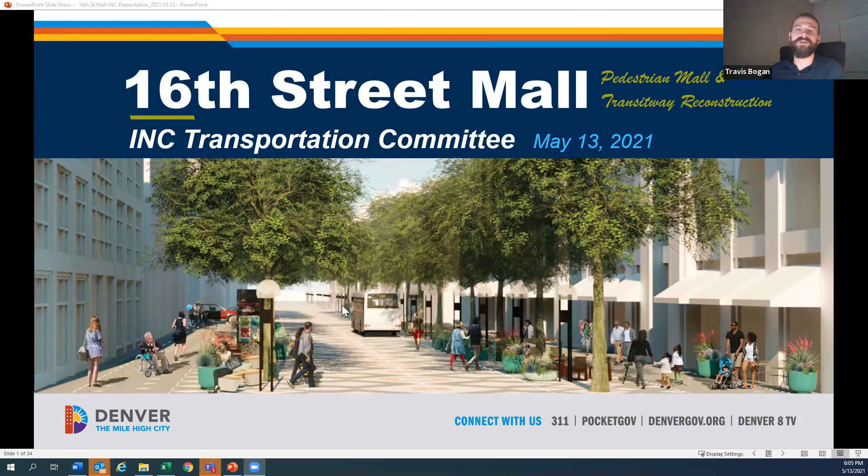Well, thank you everyone so much. We appreciate the opportunity to present to you tonight with an update on the 16th Street Pedestrian Mall and Transitway Reconstruction Project. We'll be going through quite a bit of material over the next 20 minutes, so we've reserved some time at the end for Q&A. Just wanted to provide an overview that the 16th Street Pedestrian Mall and Transitway, as you know, is one of the most successful pedestrian malls in the nation. Some pre-pandemic numbers: the free mall ride shuttle was supporting almost 40,000 RTD riders daily. It's a resource for downtown workforce, downtown residents, businesses, and tourists.

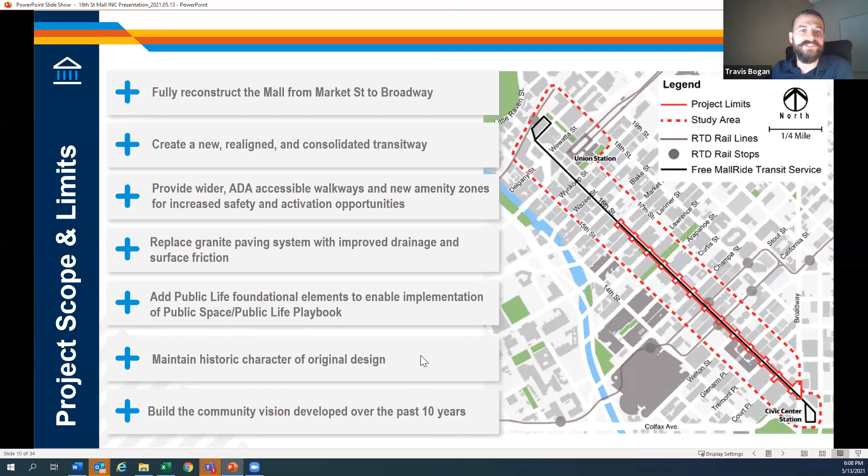Really important to the project is the public life elements that'll be integrated into the project, and Jason Whitlock will talk a little bit more about that. Throughout this whole project, we are committed to maintaining the historic character of the original design and really leveraging the community vision that's been developed over the last 10 years.

I want to give you a quick overview of the project schedule. As Joel mentioned, we issued notice to proceed to PCL constructors on April 6th. So we're a little over a month into an approximately 45-month-long project, and it is a design build project.

We're initiating the design development that'll last really into fall of 2022. But we are doing some early pre-construction work starting a little bit later this spring and going into fall, and that'll include our subsurface utility explorations, the potholing, and additional surveying.

Later towards the end of this year, there may be some early Xcel utility relocations for some construction enabling work, and that early work would really primarily be limited to intersections. The real construction, the mobilization for the mall block reconstruction, is planned for the summer of next year, and the project will be complete by the end of 2024.

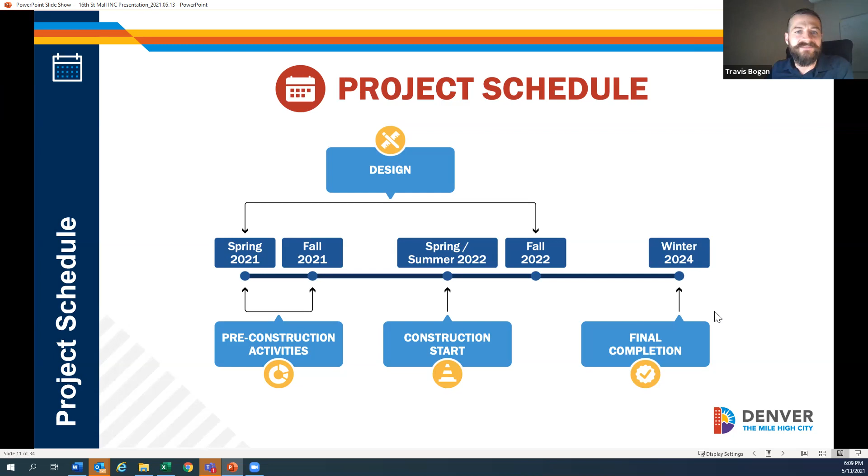Just wanted to give a quick update on the budget. The capital stack for the project is pretty complex. Much of the funding we have has been in development for years and has clear ties to the mall. We're leveraging a lot of external funding partners, including TIF administered through DURA, some local CIP funds, some voter-approved Elevate funds, local wastewater funds, and additional state and federal funds.

We also have a blended team to help deliver this project, collaborating with a number of city agencies and a robust stakeholder group. We have program management and construction oversight support from consultant partners, and then, of course, we have our design build partner, PCL.

Just a little bit of project background. I think I'll transition this over to Jason.

Thank you, Travis. Again, my name is Jason Whitlock. I'm with Community Planning and Development, part of the city, and on our urban design team. As we are and have been looking at the importance of this street, really our city and our region's main street, the number of people, as Travis was talking about, that live on the mall now.

Actually, we're starting to see the number of residential on the upper side of the mall sort of increase, almost similar to the number of people living in Lodo, people that work there, people that come and visit and play. It's been important for us to do a series of studies, a series of engagements with the community throughout the process to understand kind of what the role of the street is, and how it changes.

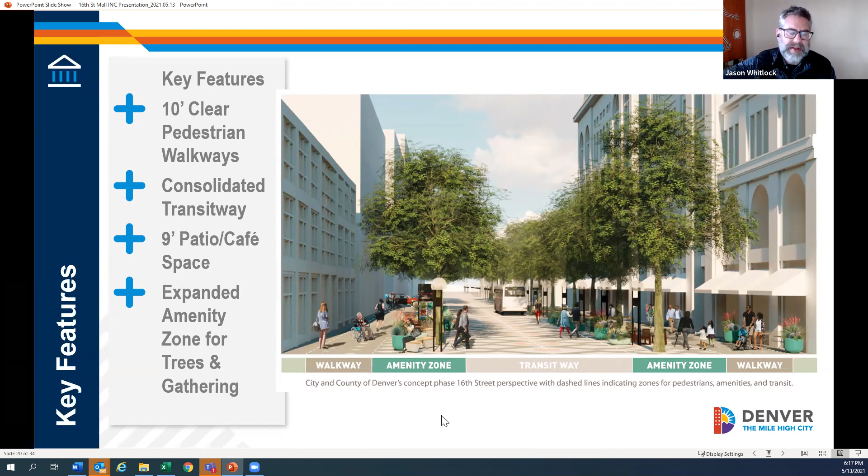And so it provides us these really good two-sided experiences on both sides of the mall as you walk up and down, and you have some distance between you and the bus, divided by that amenity zone.

The kinds of things that we're investigating now, the things on the surface, those things will actually be really 90% of what people experience as a different place on the mall - the vibrancy, additional kinds of seating, better locations for greenery, understanding the importance of planting and greenery as part of our space and our life in this downtown environment.

A variety of seating - we're calling these seating postures - the idea that the kinds of seats, the invitations that we make are really important so that people feel like they can make those acquaintances, have that coffee, and stop within the space.

So we're doing a series of studies on the kinds of furniture, furnishings, and additional planting that we're going to be putting in the future design of the mall.

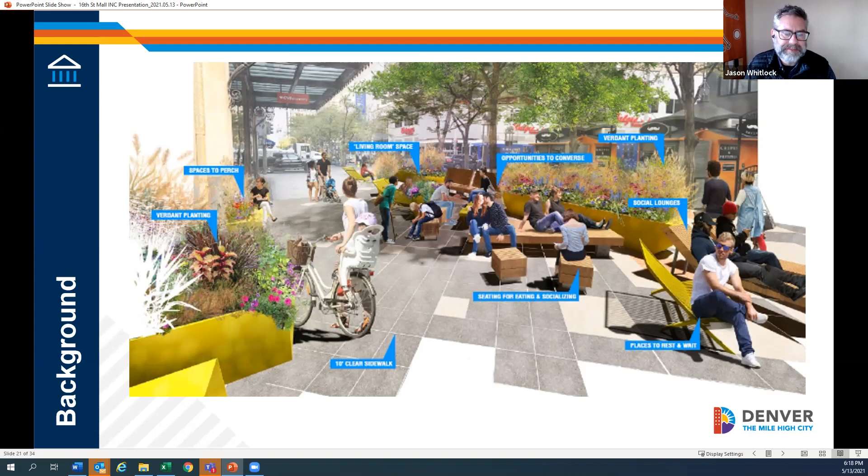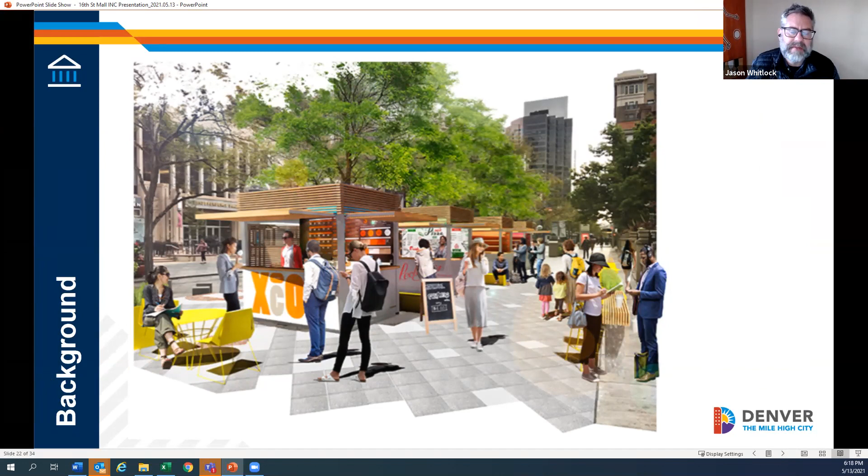And then lastly, the idea that the great streets we have throughout the country and the world tend to be shorter than the 1.5 miles of the mall length. They tend to be in smaller chunks. So we're focusing some activity on these key blocks and key character areas - we could have blocks where we're collecting some of these downtown vending kiosks and creating really good spaces there for us to have in the future.

Thank you, Jason. I'm going to continue on with a little bit of a project update.

As I mentioned, we've hired PCL as the design build contractor, and they've assembled a really great team that includes a number of disadvantaged business enterprises to support the project. We do have a DBE design goal and construction goal on this project.

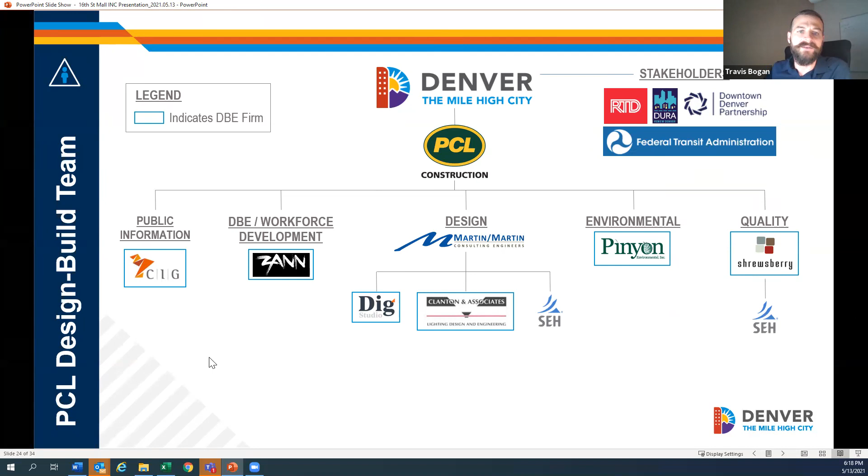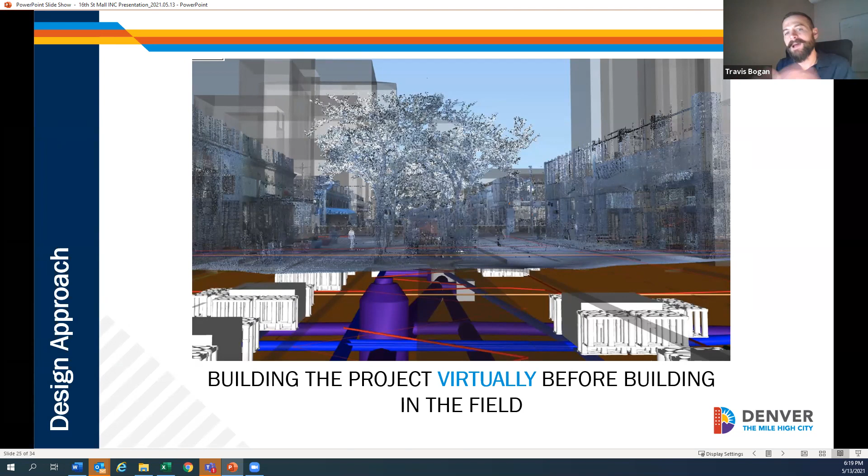And really what's neat about this model, you can see right now, is looking up from the ground. We're able to identify and design around potential utility conflicts.

We're basically building the project virtually before building it in the field. And doing this really enables identification of conflicts and resolution of those before we actually get out with construction equipment.

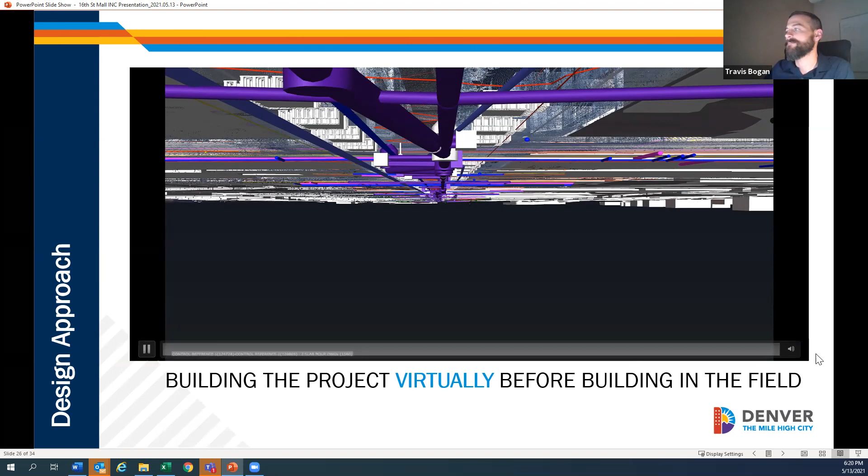We do have a robust public outreach approach, because this project is going to impact a lot of people. Part of our approach includes providing dedicated public information officers from both the city side and PCL side. We're developing a public information plan and a crisis communication plan.

We have a number of public outreach tactics that we're implementing, including providing materials in English and Spanish and making sure those materials are ADA accessible. We'll have a 24/7 hotline and website, really clear, concise wayfinding and signage. We want to make sure we communicate key project information and progress using a lot of different media - renderings, infographics, flyers, newsletters, e-blasts, website updates.

We'll have a number of pop-up events, and of course, we are going to coordinate with other projects like the Convention Center expansion and any Skyline Park work that could be going on.

Want to also mention that Denver's Department of Economic Development and Opportunity is providing business support. As we mentioned, the mall is home to over 300 businesses. 200 are really directly located on the mall, and about half of those 200 are locally owned.

So for 2021, DEDO has $300,000 dedicated to support these mall businesses, and that support will come in the forms of technical assistance, helping them prepare for construction activities, small business stabilization grants, and identification and support in attracting potential new mall tenants.

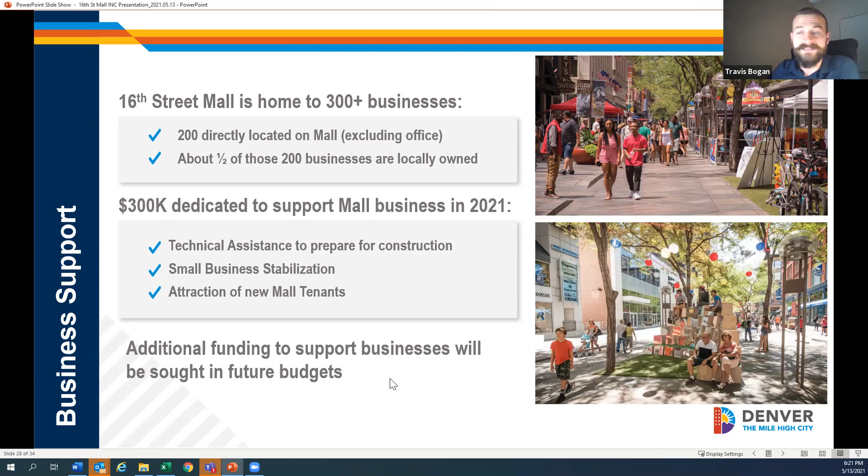And the construction will typically be in 3 phases. The first phase will be construction within the transit way and extended limits. While the construction is occurring in this zone, pedestrians will be safely routed alongside the storefronts. This will be really the longest duration, likely a little bit over a year.

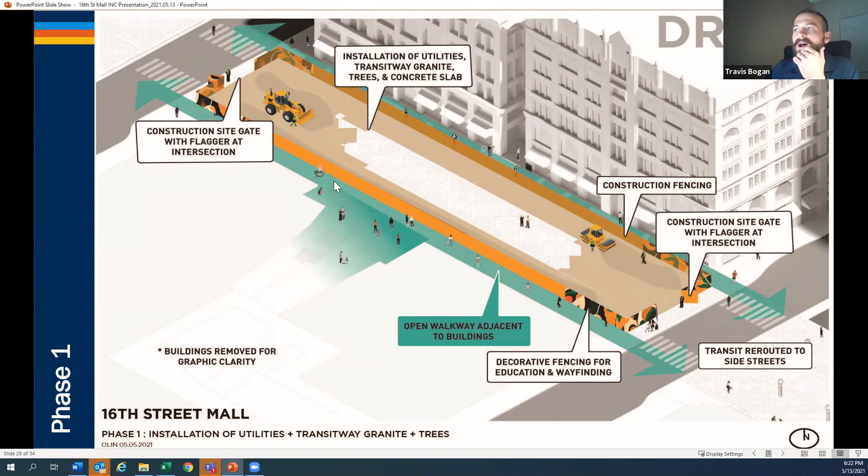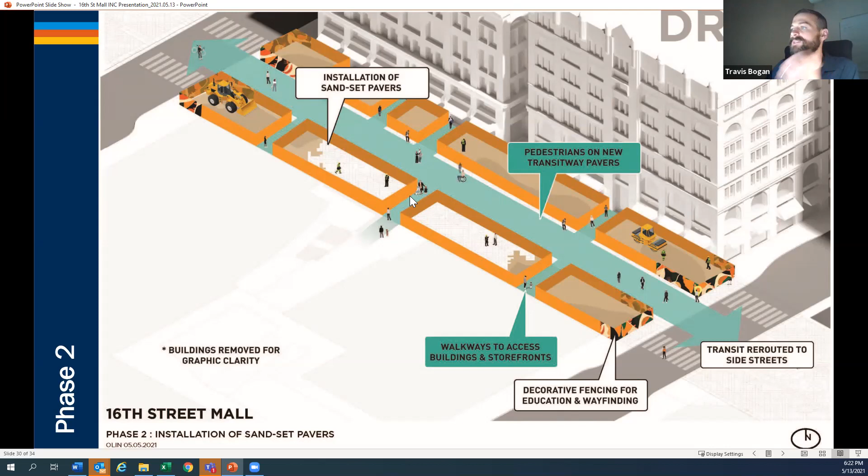One thing to note, we do have constraints and requirements that limit the construction on a mall block to no more than 18-month duration. So after this first phase, PCL will flip the construction, and pedestrians will be safely routed within what will be the new transit way, constructing work adjacent to the buildings while providing access to buildings and shops and restaurants and spaces that people need to get into.

And then the final stage will be, when they're ready to basically install the public life elements, the FF&E elements. This will be a briefer duration. So overall, these 3 phases will be limited to 18 months in duration. And throughout, accessibility will be maintained for pedestrians and bicycles, and the routing will be ADA accessible.

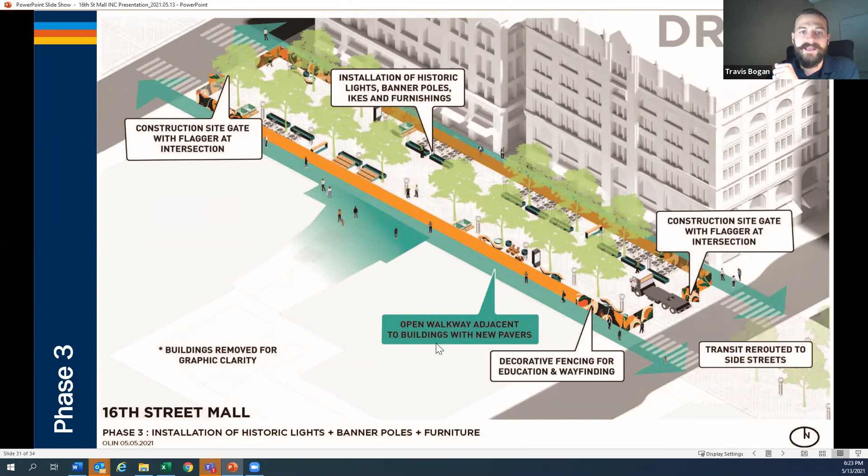I'd like to hand this over to David Krutzinger, DOTI Transit Director, to talk briefly about coordination with RTD.

Thanks, Travis. Thanks for you and Jason giving a great presentation on all this information.

RTD and Denver will be closely aligned and coordinated on this as this goes into construction to make sure that we minimize transit impacts and maximize the project success. We'll work together to communicate to riders when individual blocks or groups of blocks will be going into construction so that people know how to plan their trips, whether they're going downtown for work or for convention or for pleasure. So we're looking forward to keeping our communication high and delivering a great project.

Thank you, David. Just real quick, a brief overview of next steps. As I mentioned, we're in the pre-construction phase, and we're going to be doing some of our additional due diligence and construction enabling work, which will be the potholing, surveying, and some of the early utility relocations I mentioned.

We're also, of course, coordinating the work with the summer events, like Jason mentioned, the Meet in the Street. And we do anticipate starting some of that construction enabling work at the intersections later this year, with the full construction mobilization, as I mentioned, next summer.

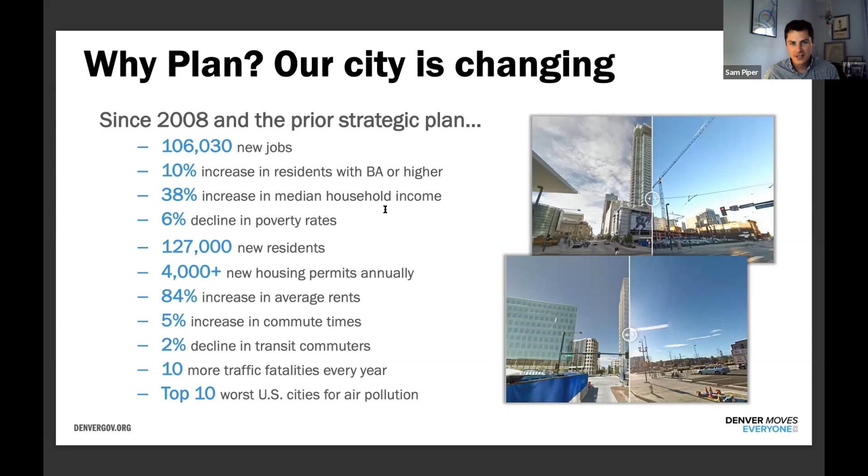So we as an organization and as the city and county of Denver prioritized the recognition that we want to eliminate serious injuries and traffic fatalities on our streets. This really all culminated in 2019 through the vote from the residents of our city to change our charter and to transition from a public works agency to a Department of Transportation and Infrastructure.

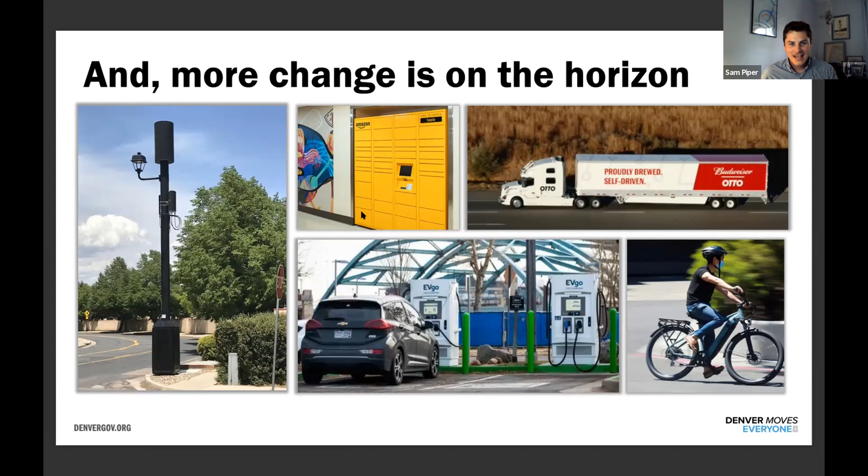What we're calling this is setting the foundation, where we're trying to understand where we are today and what our values are. As Joel mentioned, in terms of a value statement, we've done Blueprint Denver, we've done Denver Right, game plan. So there's been a lot of citywide visioning around what those values are. We don't want to reinvent the wheel, but we do want to align our goal framework and create a goal framework for Denver Moves Everyone that fits within the Denver Right vision elements, but also reflects the mobility goals of DOTI as well as the community's values.

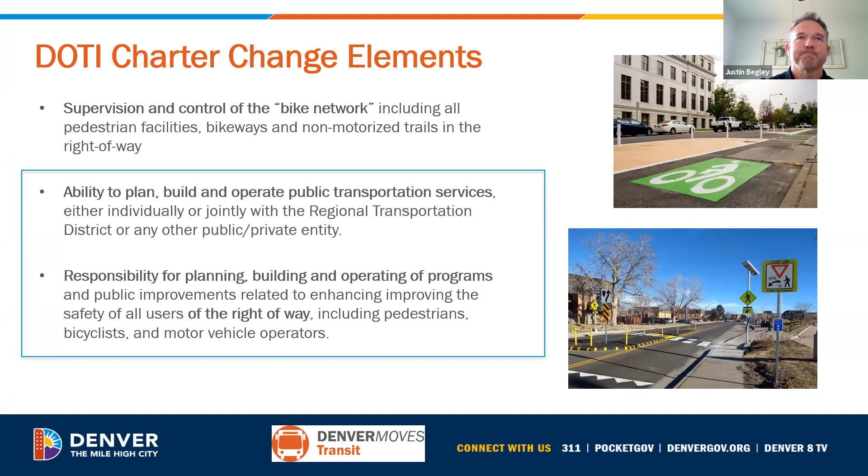Denver Moves Transit, as we talked about, and as this committee I'm sure was involved in to some degree, or access for that plan, adopted in 2019 - a lot of visionary work, like what should transit look like in the city, was very important to define then, but it needed a second phase to take these big moves as identified at a vision level: high quality, reliable transit. High quality meaning frequency - frequency, reliability, so buses show up when you expect them to and get you to where they're intended to get you when the provider tells you that.

Access and connection is very important. David and I have been talking some about that since his joining the city, looking at some places that maybe are geographically should be better served by transit, but they're kind of falling through the gaps. So I think we have an opportunity there to improve some connections between places that are not currently well served. Building a sense of place and making the most out of our investments - those are more general terms.

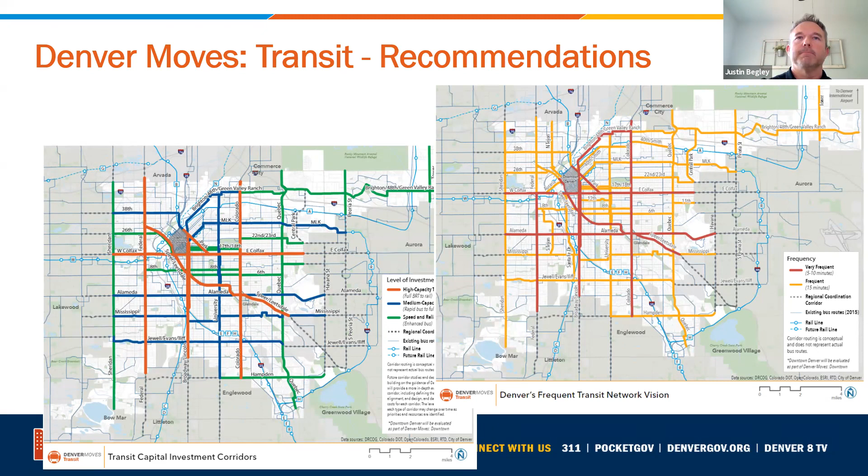Where we've really kind of rapidly moved into is our services and programs - the micromobility program, microtransit, which we're hopefully launching later this summer in the Montbello community as a pilot. We know the arterials in the city and other corridors have 40-foot buses on them. If we can get you within a quarter mile or less from access to that corridor, that's great, but there are going to be gaps in the city. How do we bridge those gaps with alternatives, knowing a 40-foot bus costs millions of dollars to operate, but microtransit we can use to fill these gaps. We're doing some planning around that now, and we hope to have a more robust offering in the coming years.

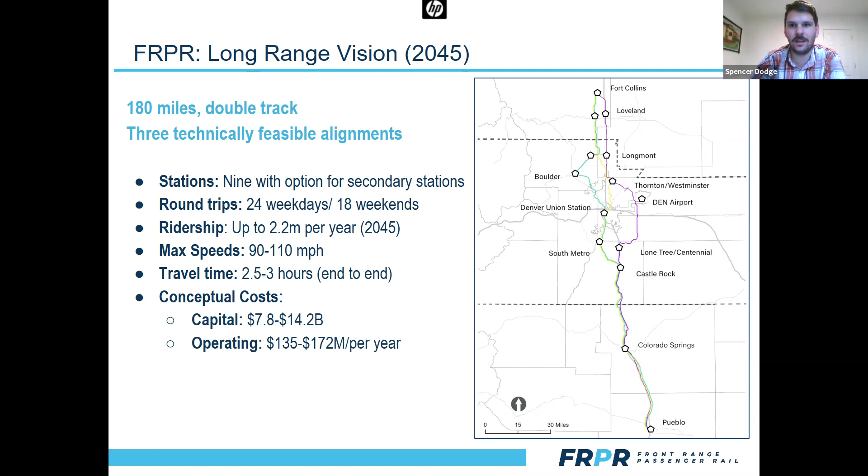Specifically for Denver, I'd like to highlight what we're looking at here. This is of course the most complex segment, for many reasons. There are a lot of different residential hotspots and a lot of different employment hotspots. And technically, feasibly, it's a really constrained area for expanding rail in general, be that freight or passenger. So really having to thread a couple of needles through town is one of the bigger engineering lifts there.

What we have seen on the Denver area is that this is really where we see a bulk of our predicted ridership, particularly that Boulder to Denver corridor.

I'm sure that's not a huge surprise to many, as that's one of the denser areas along the Front Range Passenger Rail corridor, both in terms of employment and residential. So looking at where we can put a train, the freight railroad alignment really serves central Denver best. It shares Denver Union Station as a hub, both for Amtrak and for RTD. So we can really play off of these existing transit networks, interacting with the commuter rail and the buses in town.

We've looked at the potential to add an I-25 Broadway station on those freight alignments to serve as a Denver Tech Center transfer, moving folks from the Springs who are coming up to the Tech Center, or down from the North Front Range, to get them into that high employment area.

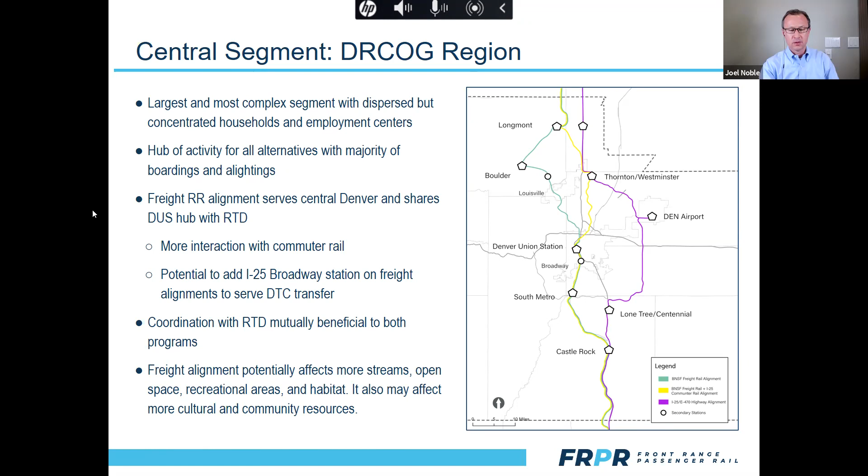I'm Steve Harley, and I'm in Baker, and one of my roles is to interpret this back to my neighbors. We've been watching the Burnham Yard part of this very closely, but have been left in limbo because there's nothing definitive, except that it looks more likely now that CDOT will purchase Burnham Yard, but there's not a firm decision to move the rail line yet. It's a very complicated question for us. I think we need to be involved early in order to sell this to neighbors.

I know it's the 'hurt a few to benefit the many' argument that can win the day regardless, but there's a lot of different questions. Part of it is how close this will run to our residential area. Part of this is what the benefits might be that we get in return. Frankly, the Broadway station stop would be a benefit, I think, that could be sold. And then there's the fact that it's going to potentially wipe out a whole lot of businesses in Baker, and some of those are our favorite businesses in some ways—new businesses that have revitalized little sections of the west side of Baker.

So we need as much advance participation as possible in Baker. Also, there's a grade separation of the railway with Santa Fe and Kalamath that is in the Valley Highway Plan. This would obviate it, but it would also delay the benefits of that for who knows how many years—we've been waiting for that for 15 years now. And it also gets even more complicated because we're starting to see more development on the west side of Baker, very close to the tracks, and the pedestrian accessibility of those areas would be enhanced by what's in the Valley Highway Plan. But if we decide those things aren't going to happen, instead we're going to wait another 10 or 15 years for bridges over rail lines to be built through Baker, then we wait another 10 or 15 years before people who move into these new residential developments can even safely walk to the rest of the neighborhood. So please involve us as soon as possible.

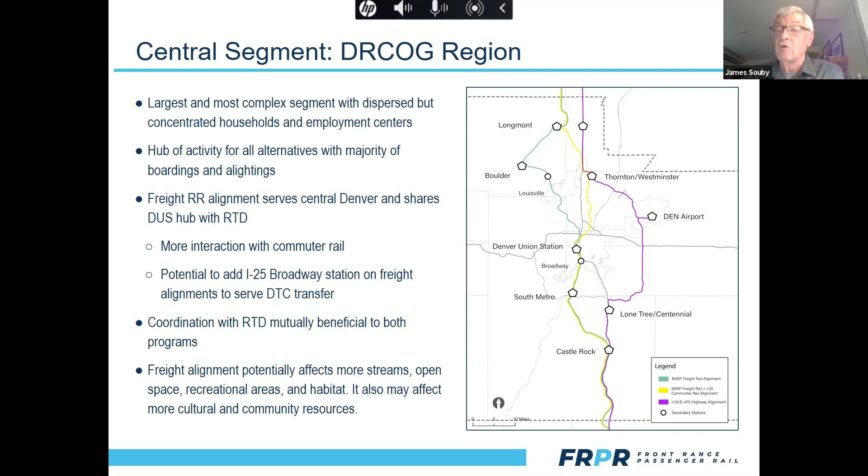As you might imagine, the legislature directed us to facilitate the development of this line. So one thing we want to do whenever possible is identify any problems—that's what this front-end business is all about—resolve what we can, or at least provide this information to the new district board. As it stands now, that new board would meet May 1st, 2022, and it would replace the commission that I now chair.

We've reached the end of our time here, but maybe I'll sneak in one question that came in from Miles. Spencer, you mentioned the speed these might operate at—this isn't considered high-speed rail, and probably wouldn't be thought of as possible to be high-speed rail in a shared corridor. Is that right? That's right.

The term high-speed rail is a little ambiguous. Some people consider high-speed rail to be 250 miles an hour; I personally think a 150-mile-an-hour train is high-speed rail. Looking at where we're going with the freight rail alignments, they're pretty particular, with safety concerns being their biggest issue. The footprint we need for 220 to 250-mile-an-hour trains doesn't really lend itself to these freight rail alignments. So we're really focusing on making sure we can be competitive with single occupancy vehicle travel times. Looking at a 180-mile corridor trying to hit 9 different stops, having a system that goes 220 to 240 miles an hour becomes difficult—as soon as you hit top speed, you'd have to immediately brake back down. So we're really trying to balance cost efficiency with travel times. High-speed rail specifically where the freight rail alignments are isn't currently something we're looking at, but it's not something we want to preclude either.